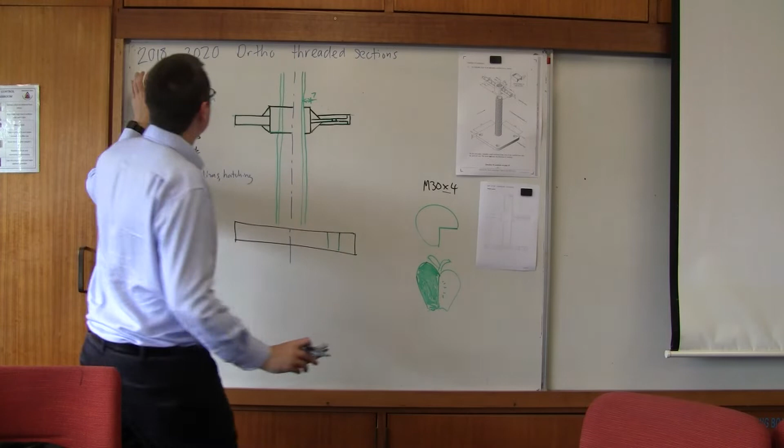In this video, I'm going to try and go through the 2018 to 2020 ortho-threaded sections. There has been an ortho-threaded section in every one of the last 20 years of papers. There sometimes can be questions where they want you to talk about third angle projection, and what that means is that you get the top view on the top and the front view on the front, and they need to line up. They can't be all over the place.

So I've drawn my construction lines, and then I've firmed in. I've got top and front. In Australia we use third angle projection. I will say though that has been less of a thing these days. So I just make it clear that even if you have the views in the right spot and they don't line up, you'll still lose marks. So it's important that the top view is on top and that they line up.

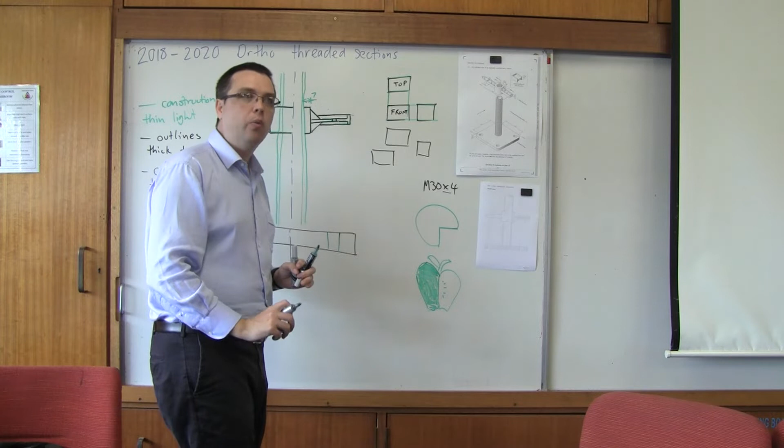We're going to do a half section. So when we do a half section, I have a picture of an apple. We can see that in a half section we're showing half of the apple in section, which means we're removing effectively 1/4 of the apple. Our section line would be 1/4 of the apple.

Because I'm using a whiteboard, I'm going to use different colours to represent my thick lines, my dark lines. I had already started drawing this drawing, but the camera was pointed in another direction, so I restarted.

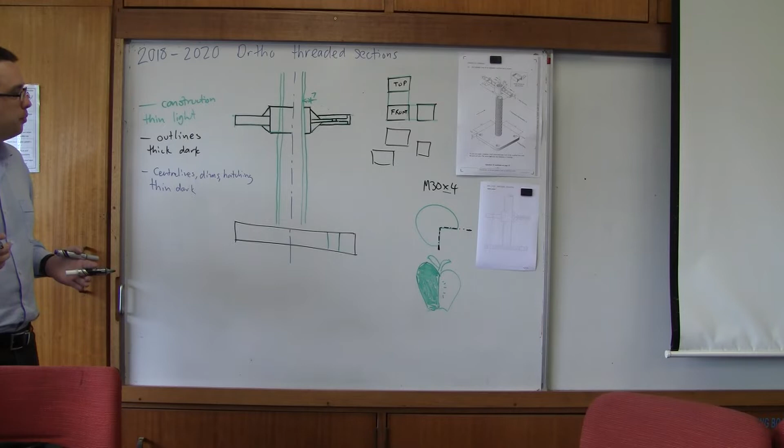The part we've done so far, I think, there's not a whole lot going on that's really of concern. What we talked about a little bit is how we worked out this dimension. We're told that this is an M30x4 bolt. Does that mean it's fine or coarse? Fine, right? The x means it's fine.

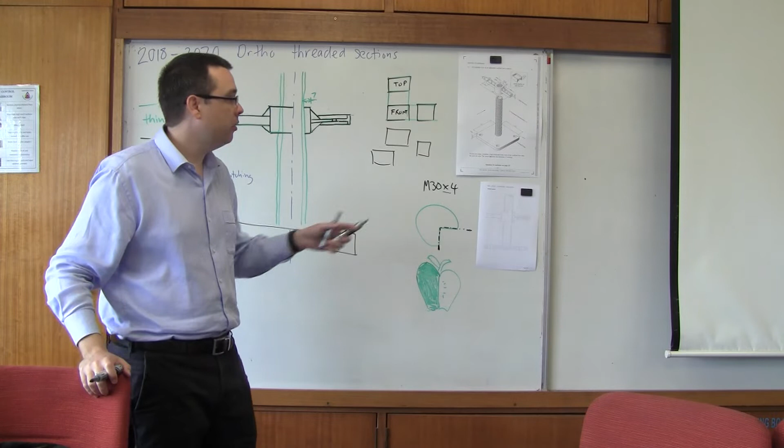So the d min, the distance from the outside to the inside, is going to be 30 minus. I'm just going to show those dimensions in green to show that's my working out. The outside here is 30. This is our d, which is 30. And then this value here is d min, which is 30 minus 4, which is 26. So that gives us that d min dimension.

Now, this dimension, we're told that the outside here is a diameter of 40. And if this is 30, that means, oh sorry, it's 44. 44 minus 30 equals 14. But there's two sides, so this is 7 millimeters. So 14 divided by 2 equals 7. That's how we get that 7.

Now, that dimension is far more likely to matter, whereas this dimension here, taking this 4 millimeters off the drawing, I don't think that you'd lose marks over that. So if you're rushing for time, and if this is a 6-mark question, you have 11 minutes or less to do this question.

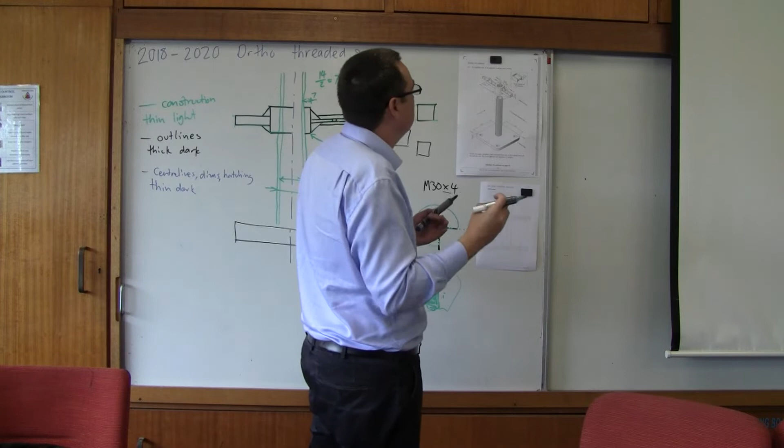If it's 11 minutes, you maybe don't have time to measure everything. If you're looking and say, I just can't see the distance, I can't see the size, then you're probably better off just doing something reasonable, because I don't think you're going to lose a whole lot of marks for that dimension.

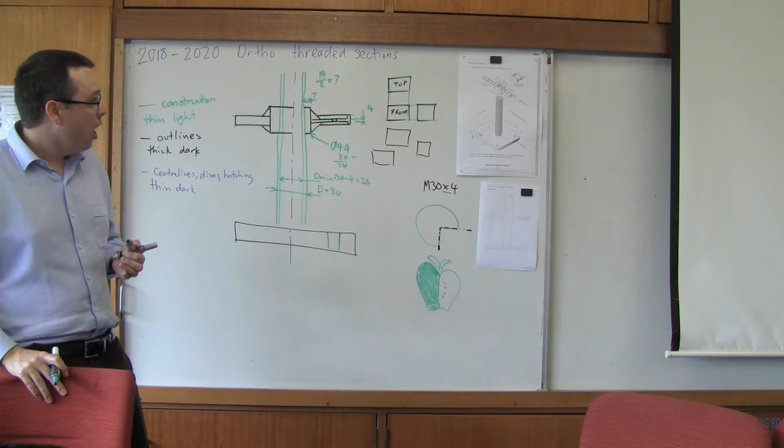Now, when I drew this, I drew the whole thing. Normally with a construction line, I would not remove it, but for you, I'm going to remove it just because I don't want to confuse you with the colours. And we're going to go through now, and we're going to section.

Now, in the HSC, the HSC gives us answers. I don't think we should be sectioning this part here. I think that we should be leaving that, following our rule of half sectioning. So that's the difference between me and the HSC. So what I'm going to go through now is I'm going to use my section lines.

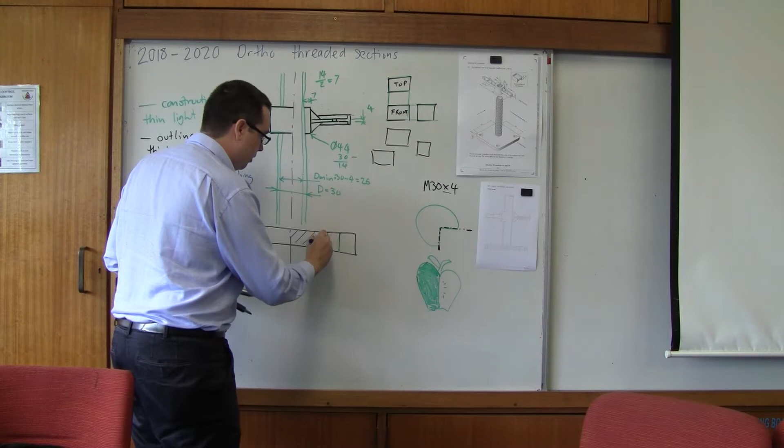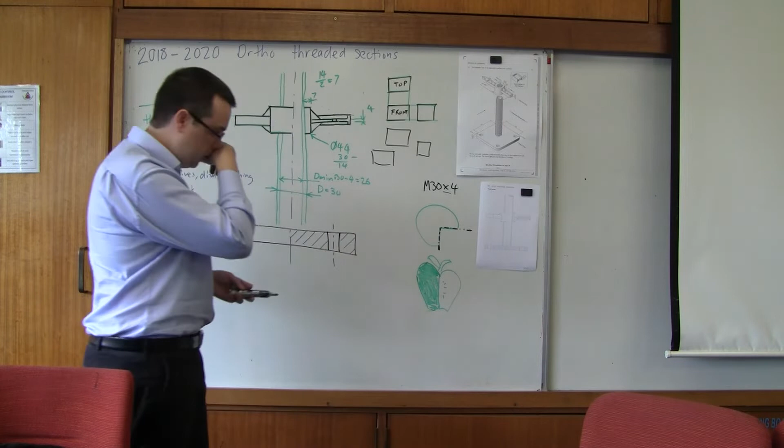And it should be thick, dark, and then thin, dark lines. Because we've got a hole, it's cylindrical, it should have a centre line. Now, the outside thread, it's going to be hard for me to draw over these lines perfectly without a ruler, but we'll see how I go. They should be thick, dark lines. The inside line should be thin, dark lines.

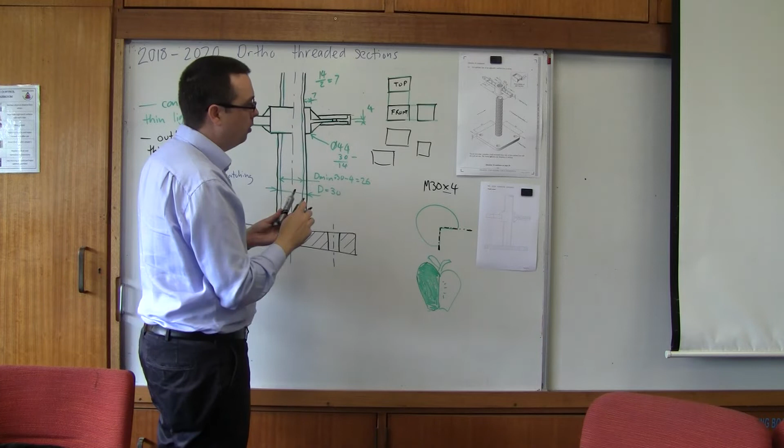Now, here, this is solid, so I've drawn that as a thick dark line already. I could have a different spacing. I could even change the angle because this material is not the same as that material. I don't think you're going to lose marks for using the same angle, but for me, I'm going to use the same angle with different spacings, because they are a different material.

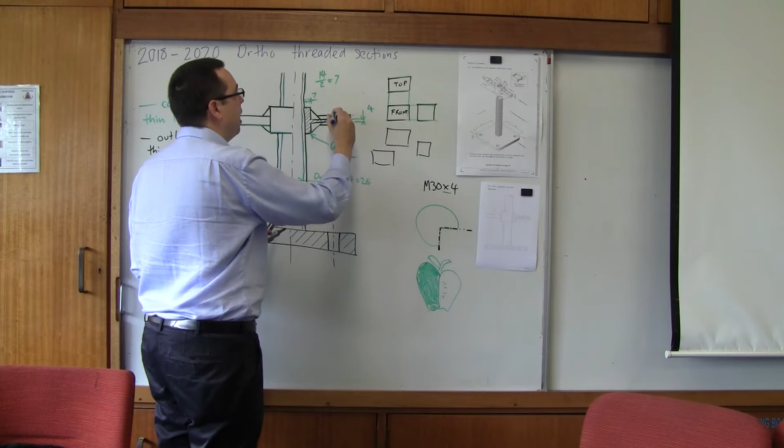And then we have a center line through here. And even though this is not a hidden detail, we can still show our center line through here as well.

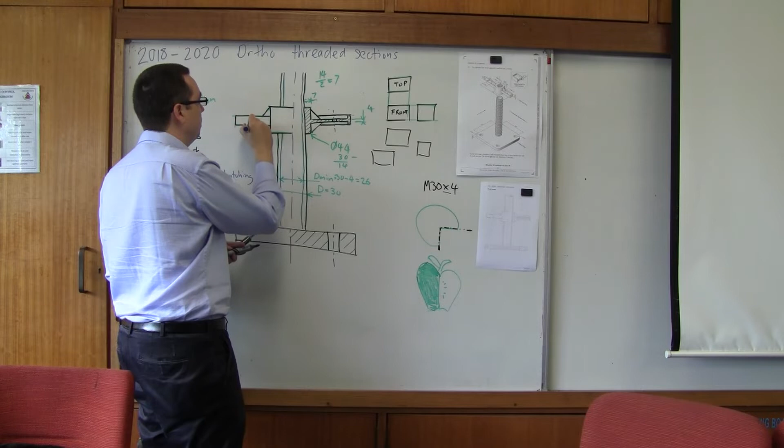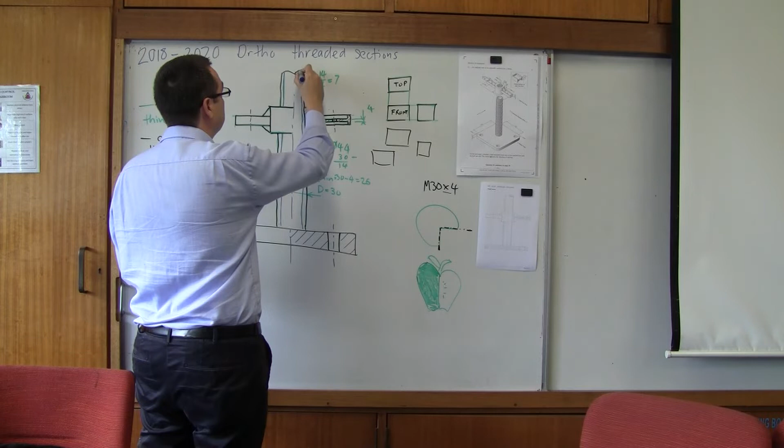Now, the last thing we need to do is we need to show our break line. Now, the break line, if you just did this, I think you'd get that. I don't think you'd lose any marks. But technically, you should actually have it hatched like this. Yeah, I had that in a different direction to show it's a different material. Again, I don't think that the HSC, yeah, they have a different spacing, but that's about it.

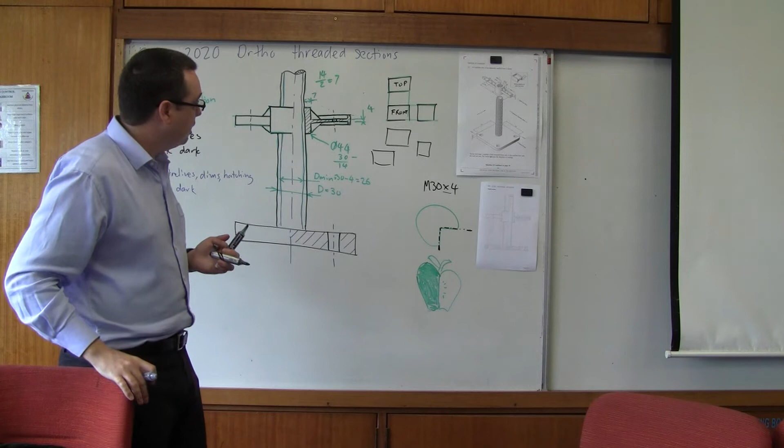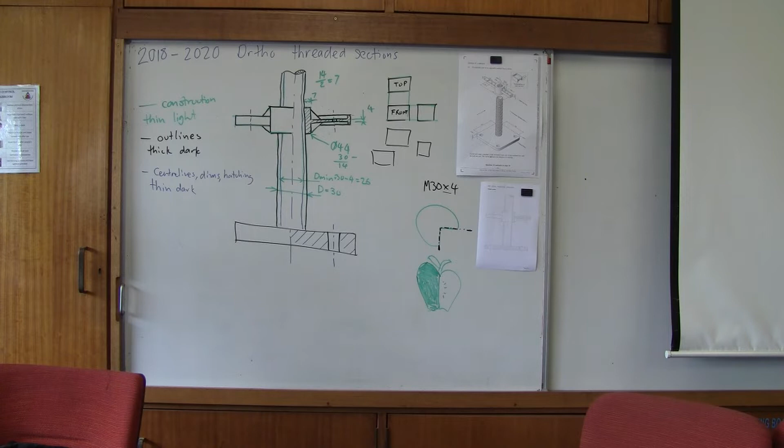That's pretty much everything I can think of for this drawing, right? For 6 marks, not having to show the top view, I think makes it a lot easier than it could have been. I think they could have shown the top view for 6 marks. I have seen a few responses, and I can tell you that for a 6-mark question, you have to make an attempt, right? You have to draw something because there's 2 marks for the taking just for simply trying, just for putting some sort of picture on the paper will get you 2 marks.

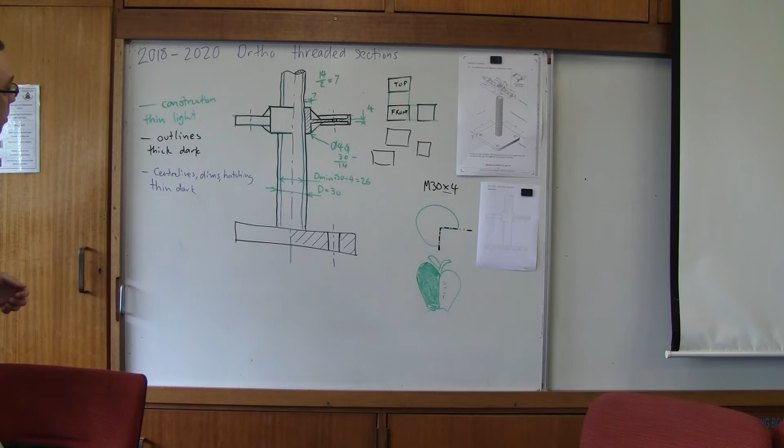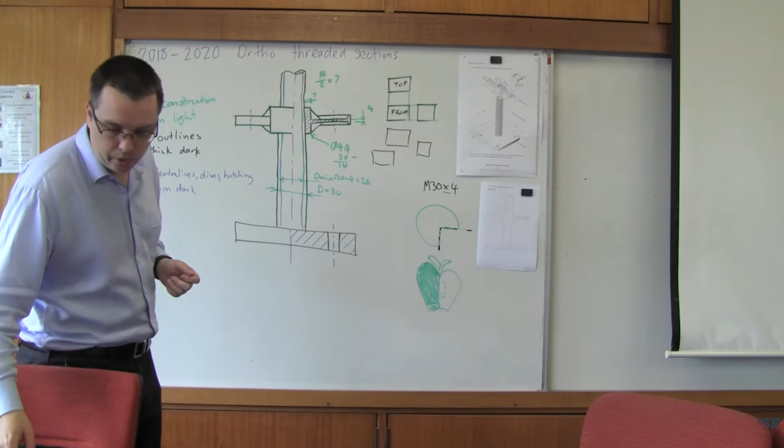Okay, so we've done our 2018 paper. It was question 24. We're going to move on to now the 2019 paper, and I'm going to try and draw that one for you. We've got the question on the board in a second. I'll clear the picture.

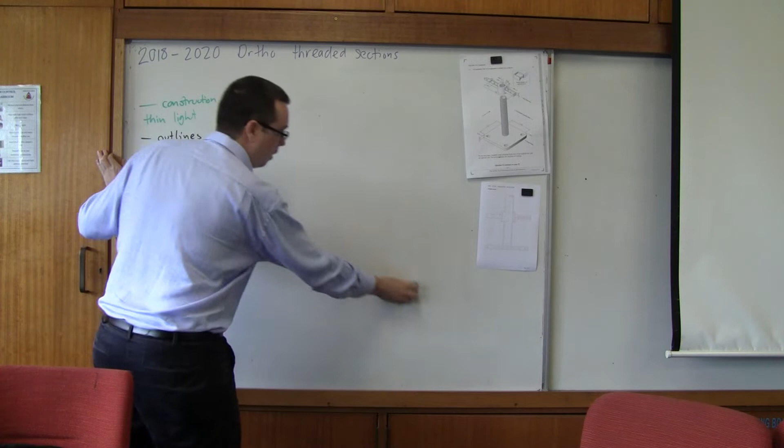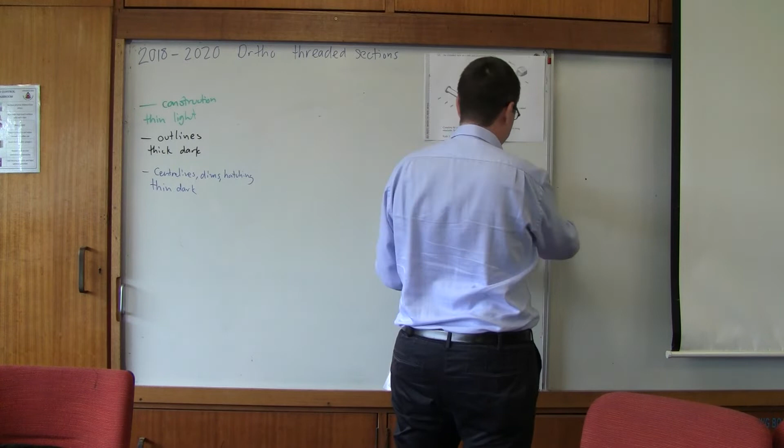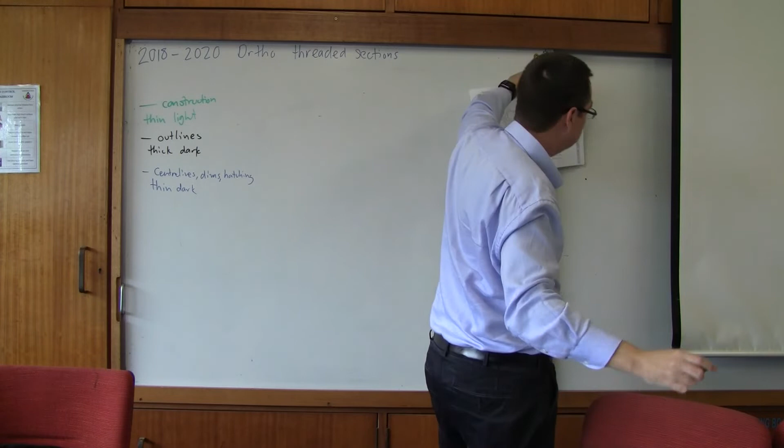The 2019 paper looks like this. Keep going. Wait, this is 2020. 2019 looks like this. Okay, this is only worth 3 marks. The last 2 years the paper has only been worth 3 marks. They give us a pretty good outline of where to start, so I think that's part of the reason why they can make this easier. I don't have the outline here.

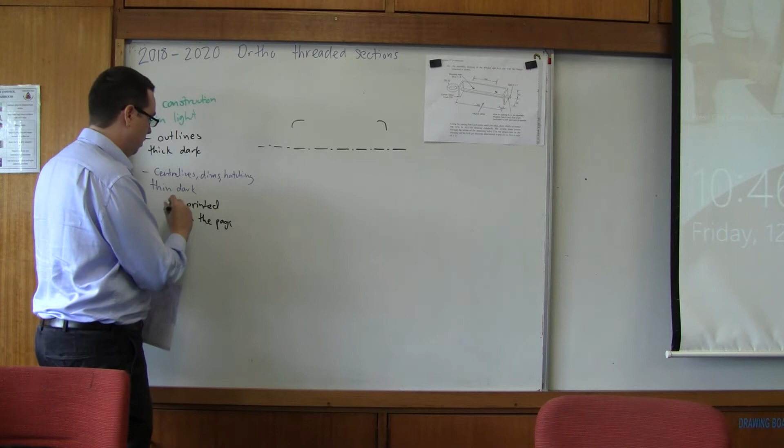Okay, so what have they given us? I will draw that up. They have given us this corner, and a center line. Now, ordinarily, center line should be in blue, but I did this one in black because it was printed on the page. And then they actually did a thinner center line here.

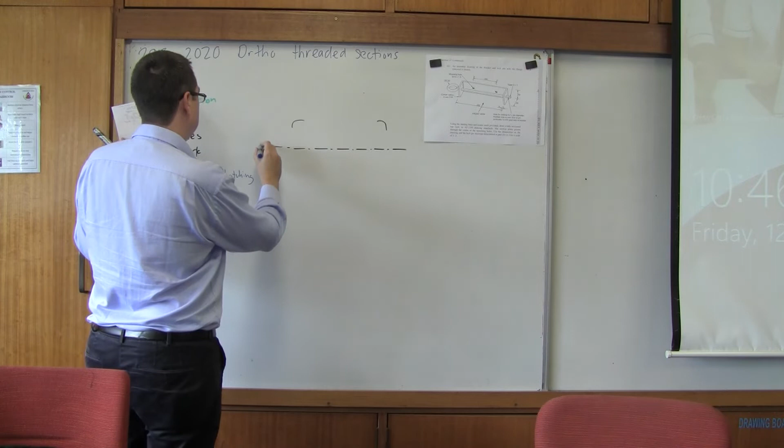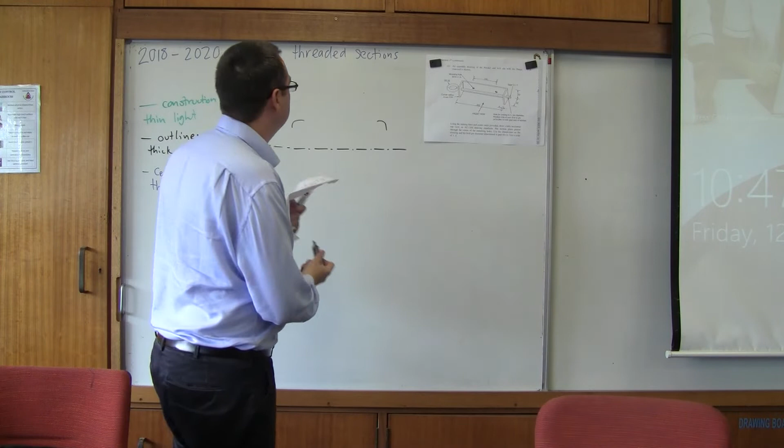So, using green for our construction lines, the first thing we need to do is, they've told us that it's 5 millimeters thickness, 50 mil long. We can assume that we've got the dimensions that we can measure 50 mil from. So it's not even a matter of assuming if it's in the center or not. It's 5 millimeters thick.

Now, you'll notice that I am not using a rule to measure these. And so this goes into my point of, don't get too fixated on dimensions. They don't care about dimensional accuracy these days. I think marking online has really affected that. What they're far more interested in is that you have understood the question.

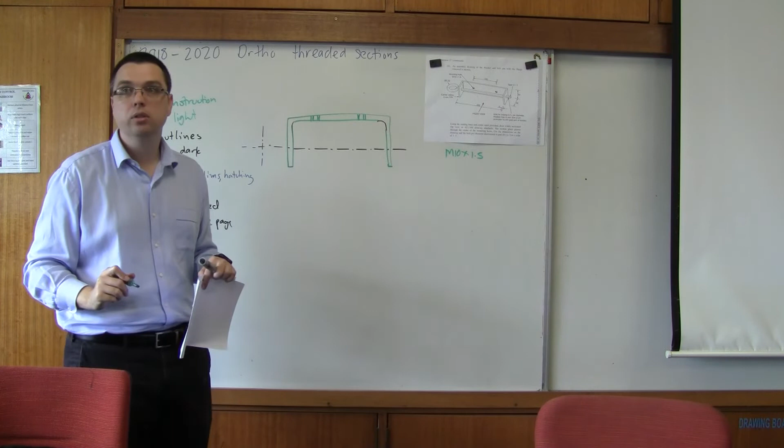Now, I think something a lot of people forget and a lot of people would have lost marks for is they said, this mounting hole is M10 times 1.5. Fine or coarse? Is it fine or coarse? Fine, because it's got an X. Right? Now that said, I would not be doing the deduction, me personally, to get 8.5 millimeters. I'd just say it's close enough that the marker's not going to be able to see looking at a scan on the screen.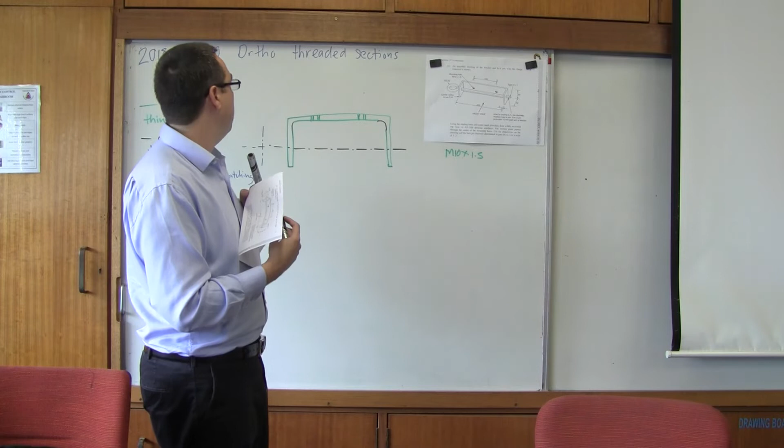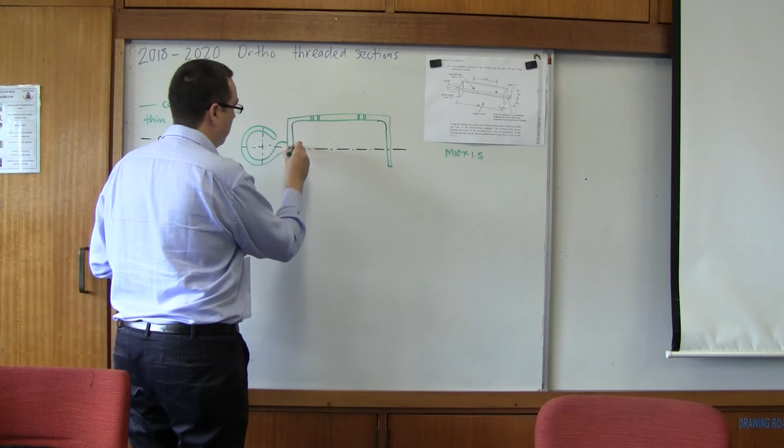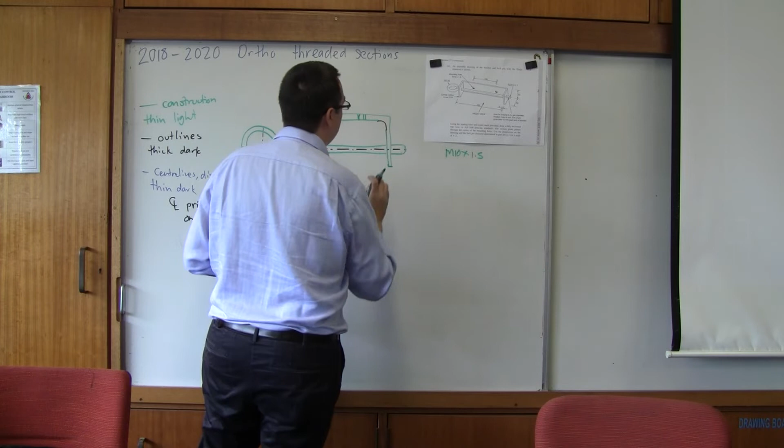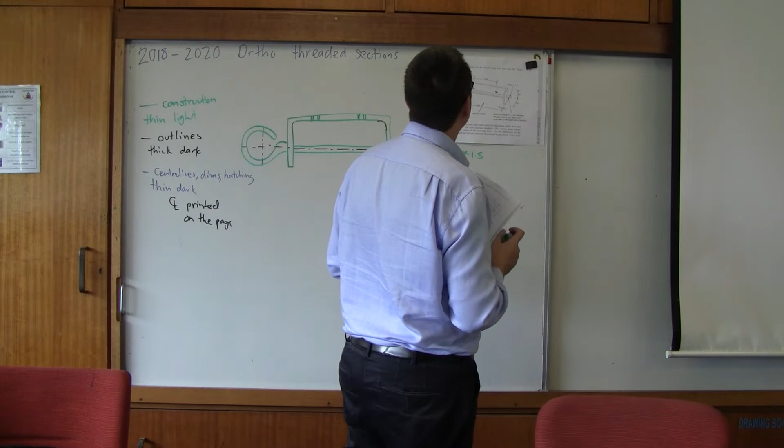Now, I have to draw this bolt. Again, I think if you free-handed this bolt, or this pin, you wouldn't lose any marks. Okay. Here's the dimensions. Use a scale of 1 to 2. Dimensions in the drawing, lock pin diameter. Draw a fully sectioned top view. Okay, so we're pretty close to having finished the whole drawing.

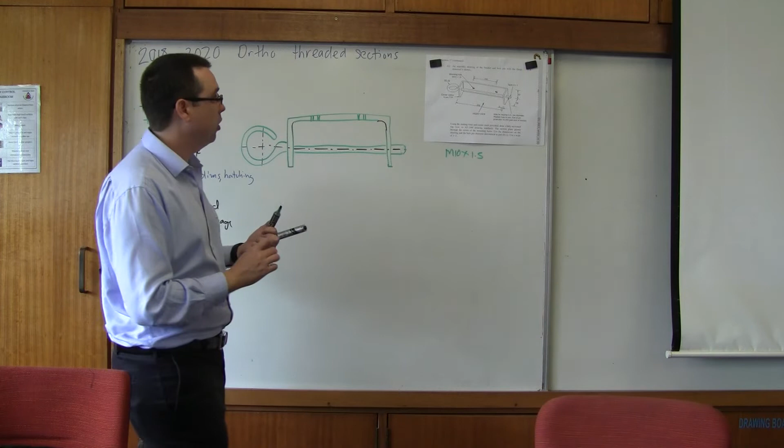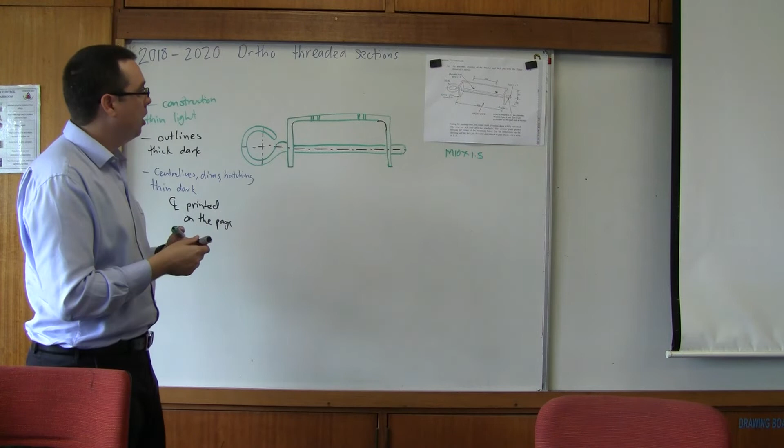Now the question is, do we section this pin? I don't think you would lose marks for sectioning this pin as long as you had sectioned something, right? But that's my position. What we want to do is we're going to outline our shapes in black. So once we've done our construction lines, we're going over it in a thick dark line. Now the outside of our threaded section is in thick dark lines. A whole pin.

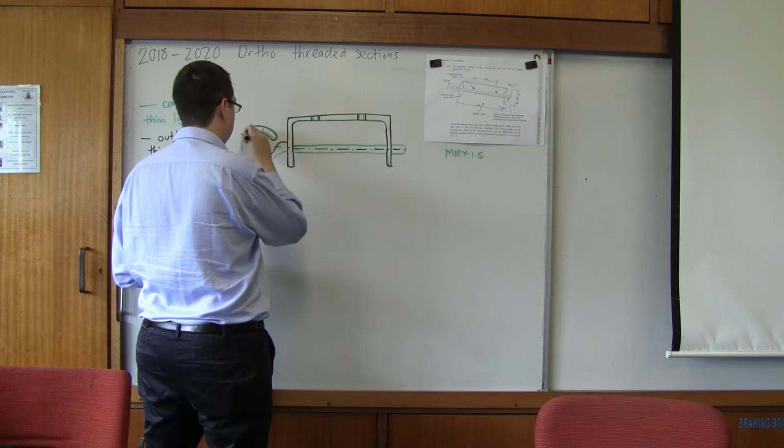Now this is why you don't section, you pay attention, because now I have to rub out the page, right? Because you'd lose a mark there for doing what I did. This here, you're going to lose a mark. This is the correct answer.

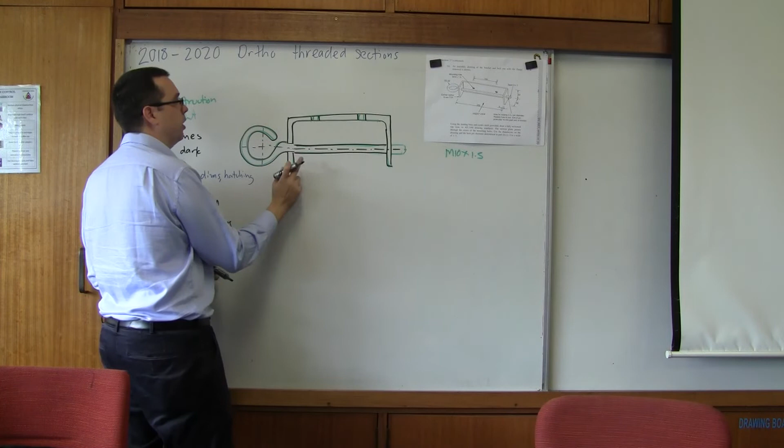Now, why am I unsure whether or not I should section this? Well, we don't section threads, right? We don't section washers, we don't section webs. So this is kind of in a grey area, this cylindrical object. I'm not sure whether or not I should section it. So I don't think you're going to lose marks. I will tell you that there were drawings that showed this section here as a detail. I don't think anyone lost marks for not including that detail there, that hole. And certainly not showing the center line, I don't think you're going to lose marks, but you should.

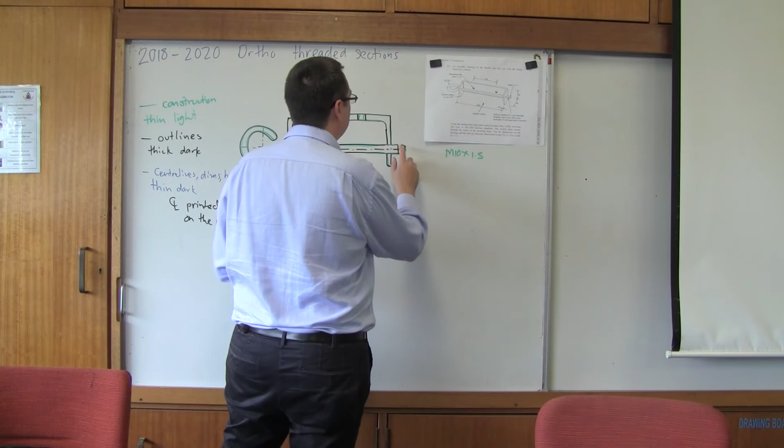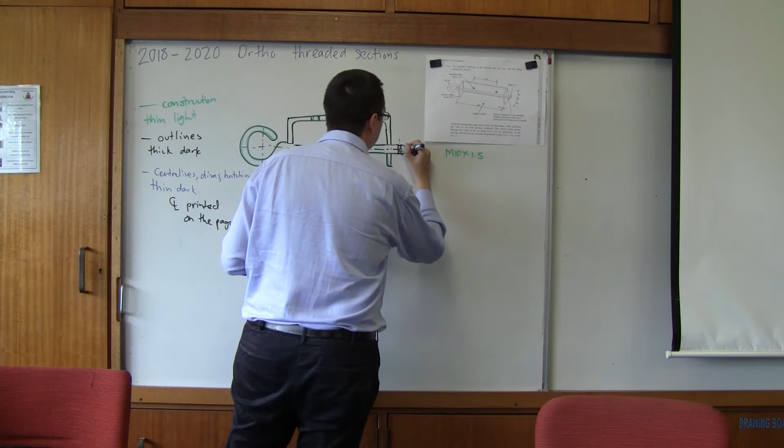There's even an element where a really advanced answer would say, oh, well, that would curve in. But you've got to remember, this is a 3-mark question. There's just not that much room for differentiation between a student who knows literally nothing and a student who's gone to a lot of work of showing the correct answer. So,

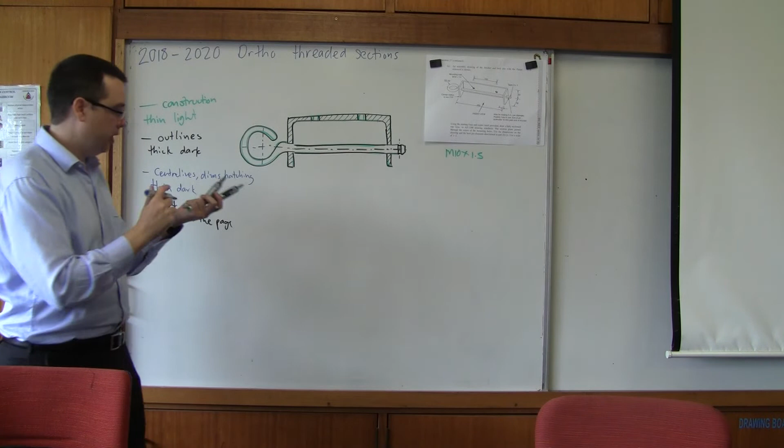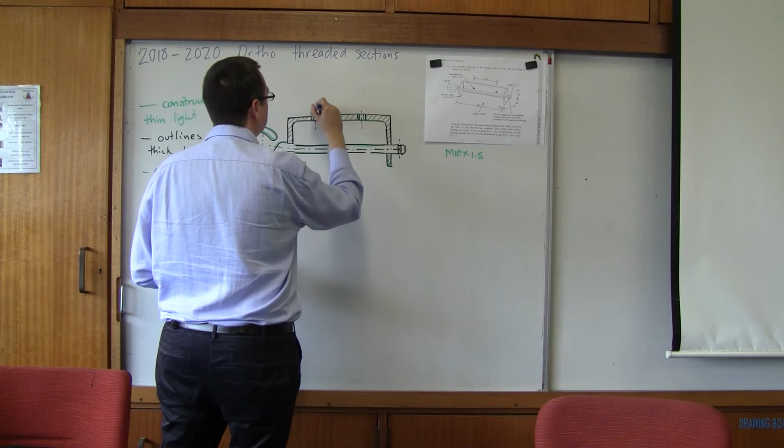funnily enough, I didn't print out the HSC answers. This internal thread, so this is how we view threads from the top, or axially, through that center line. Remember, we need to draw a center line here. Now, in my discussion with markers, I've made the point that I think these lines are really important. I think these should definitely be a part of marks. But for 3-mark questions, there's not a whole lot of room for differentiation. For a 6-mark question, we're in a much better position where we can start forcing.

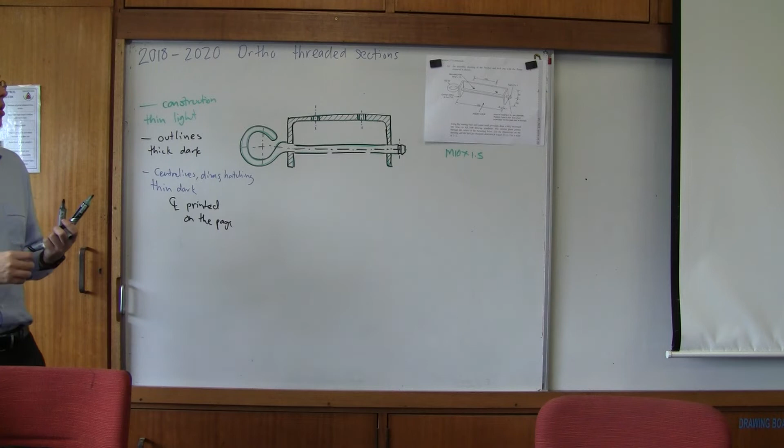This is nothing, where I smudged it with my hand, sorry.

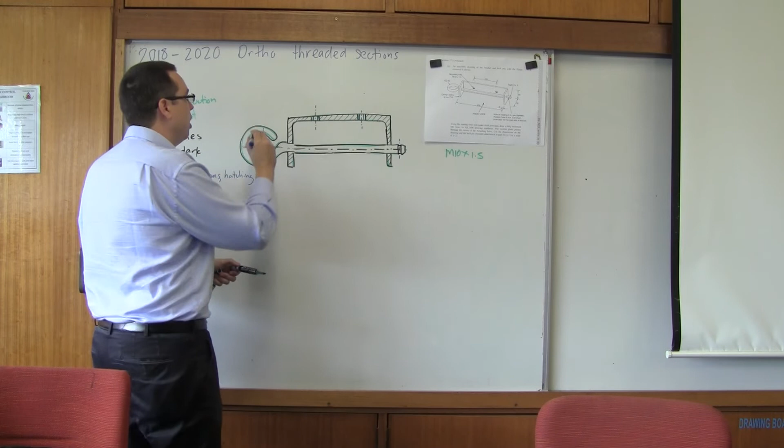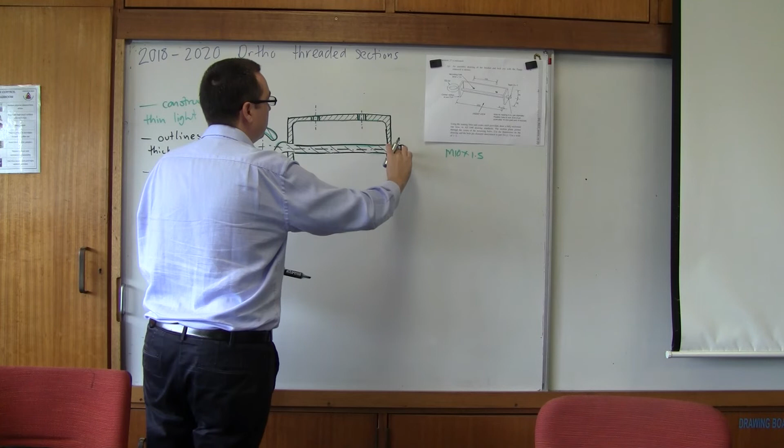I think if you're going to show that hole, at that point it probably makes sense to section. So let's just say for the sake of it, we are going to section. Well, if we are going to section, let's go like that. Yeah, just to show that this is a different material. If we go to a section, I don't think you'd lose marks one way or the other, personally. Okay, so that's what we're doing for the 2019 question.

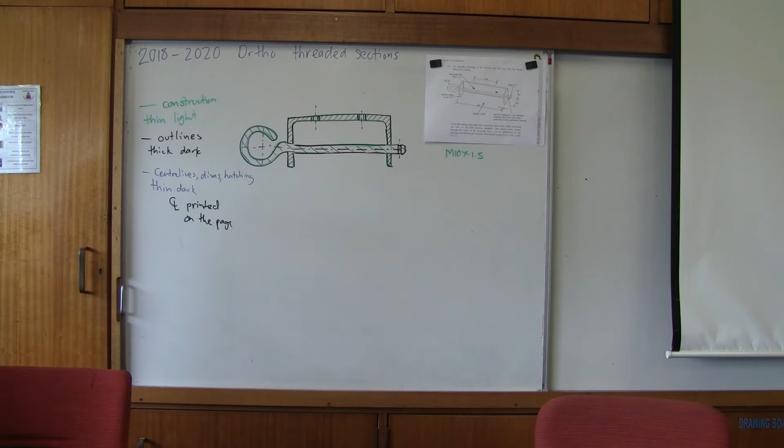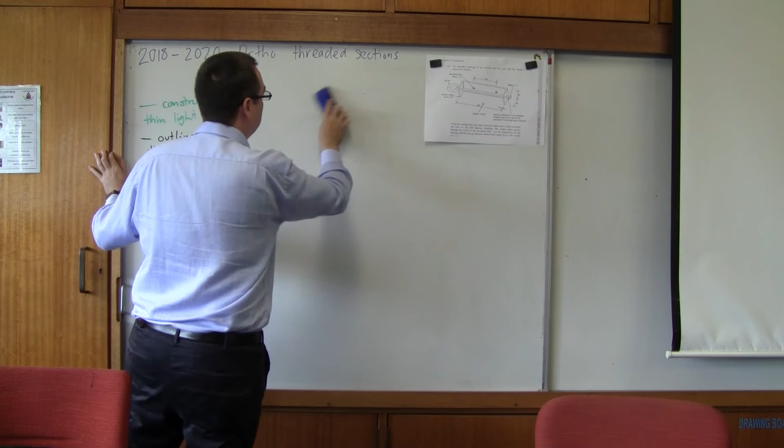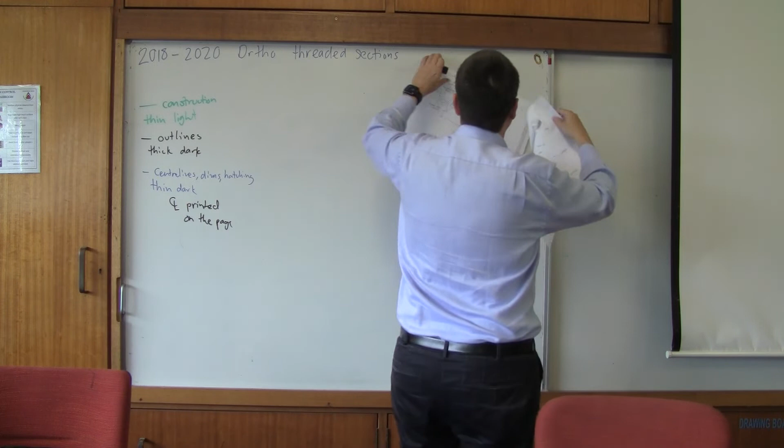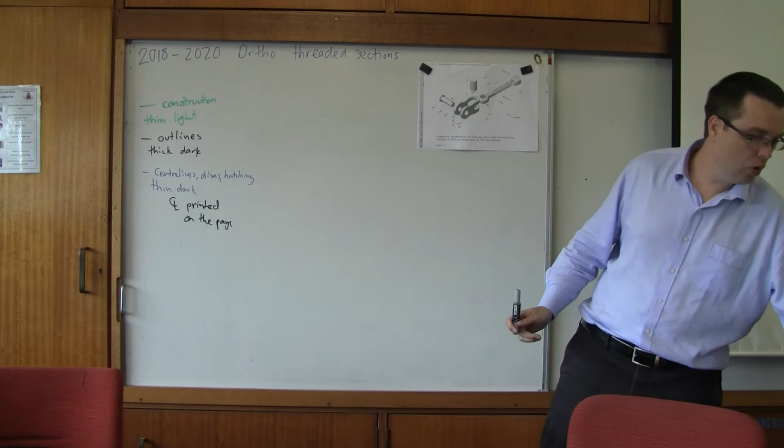Did they give us an outline? The HSC, I now found my answer. The HSC did not section the pin. But like I said, I don't think you're going to lose marks one way or the other. Do I have this answer? I do have this answer. Good. I'm looking for this answer even though I have seen this drawing a lot. So what I was looking for is, did they give us the outline? What was the outline? That was what I wanted to look at.

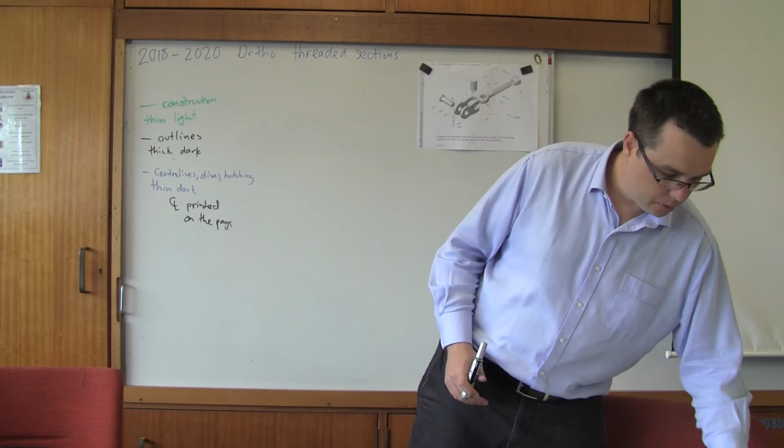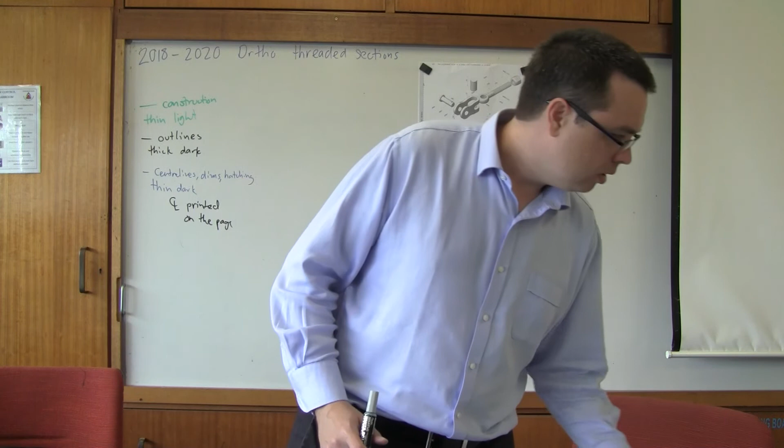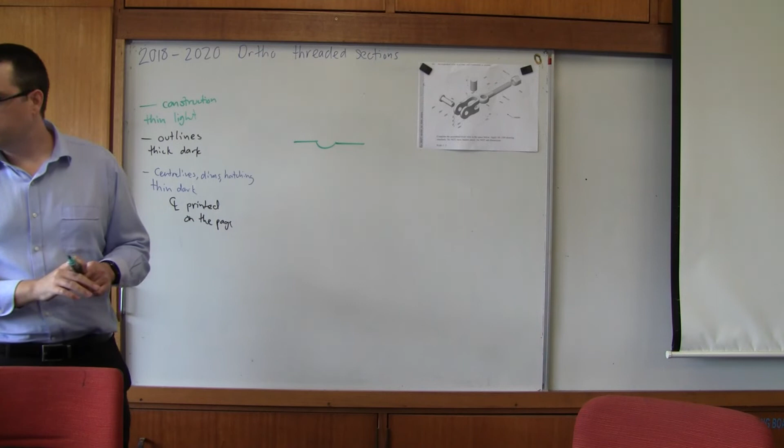Can't wait to find the one that I photocopied. No, we're just going to run with it. Okay, so they definitely gave us something. I think they gave us this shape. It's going to kill me. I'm sorry, people watching on the internet. I just need to know what was outlined.

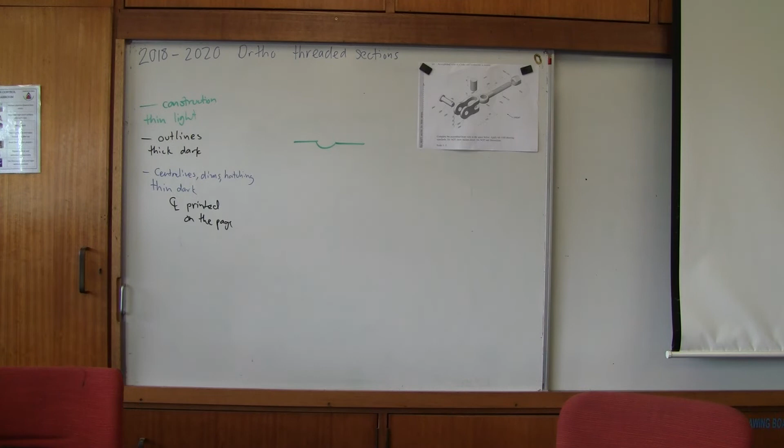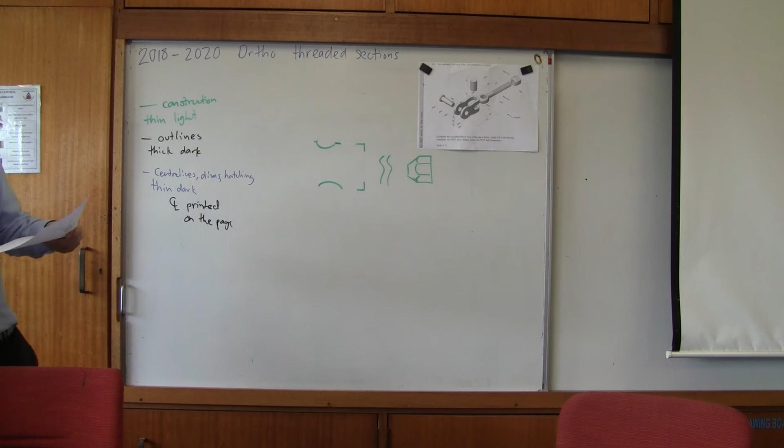Okay, so what was outlined is they gave us this curve, they gave us the corners, so they started with this, and they gave us the nut, dimension is very important. They gave us the center line and they gave us a break line. So the reason I included these, I'll just quickly print in. Were they thin dark? Yeah, pretty thin dark. I'm going to do it in blue just to maintain the convention that that's what they should be.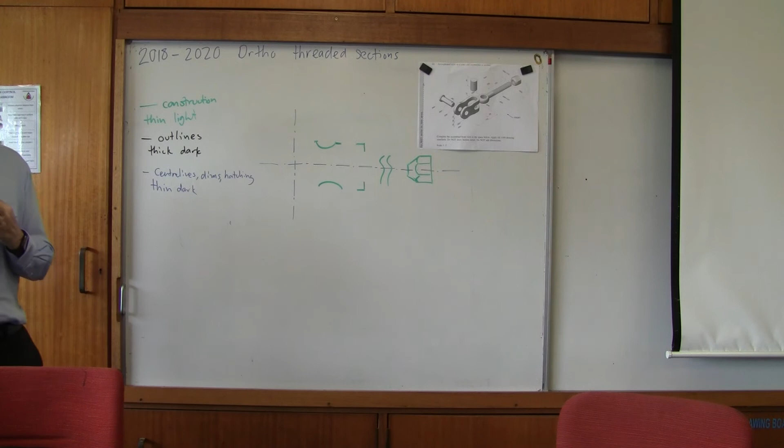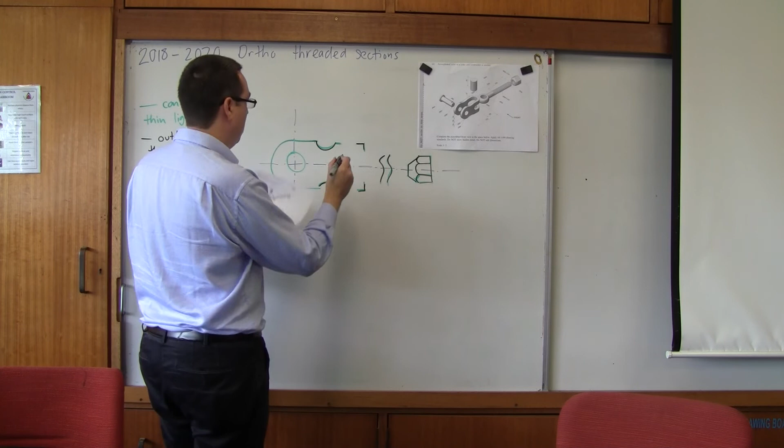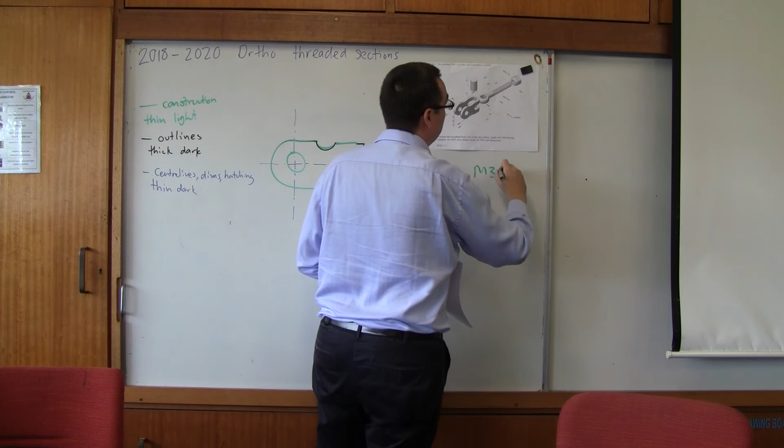Okay, so that's what they gave us, and so what they're looking for, I'm going to actually put some black. They gave us those lines. What do we have to do? So we're going to draw this circle. We know that we need to show another circle within it. That didn't require a whole lot of thought, this line, but what we need to do is calculate the width. So again, they've written M30 x 3.5, which is fine coarse.

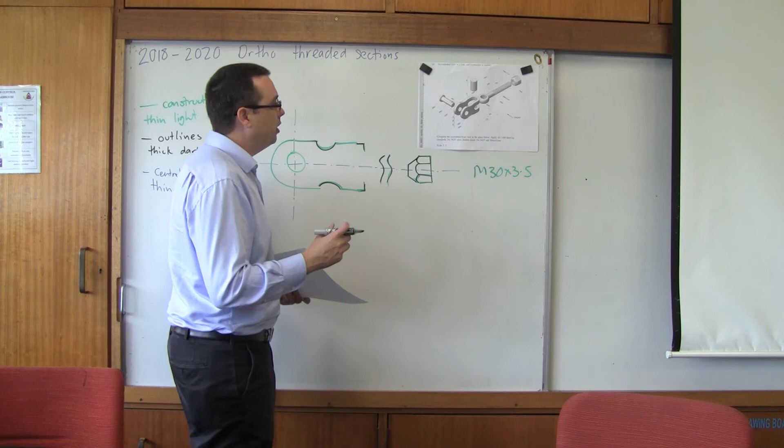Yeah, I know, it's getting repetitive. It would actually be helpful if we had a couple of coarse just to show the point. But what we're looking at here is the eyelet, I guess I'm going to call that. So that's slightly rounded. Now, you can say with a fair amount of confidence you're not going to lose marks for dimensional accuracy.

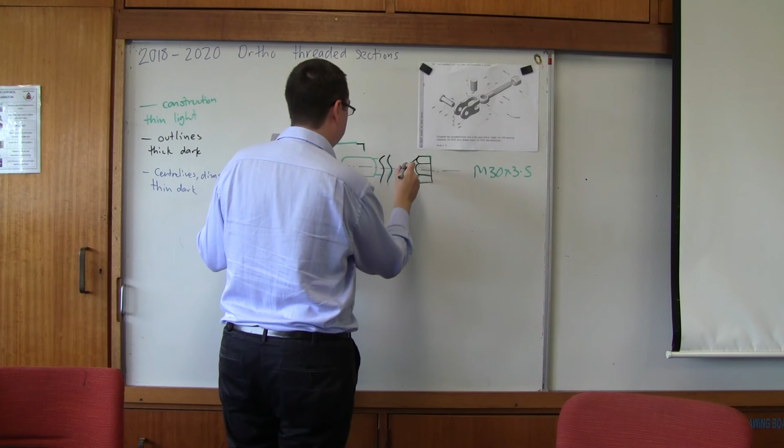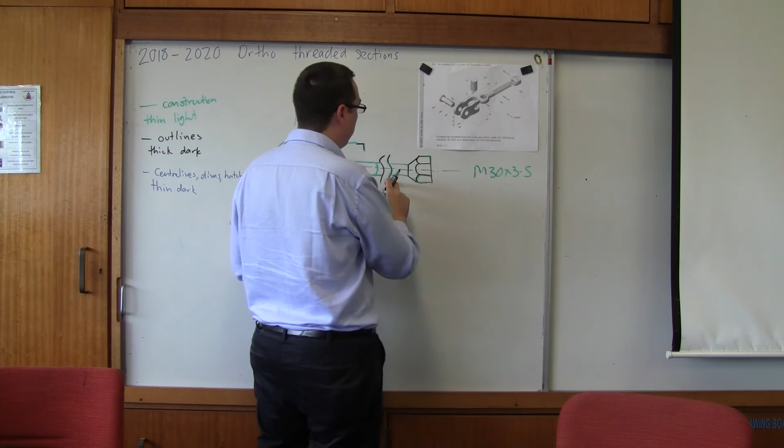Oh, we can actually even infer things here. In my experience, I don't think I've seen people use compasses to draw this. We should show some amount of thread. Now, because of this break line, we can't know how much thread protrudes, but some amount should be shown as protruding. So I'm going to draw that in.

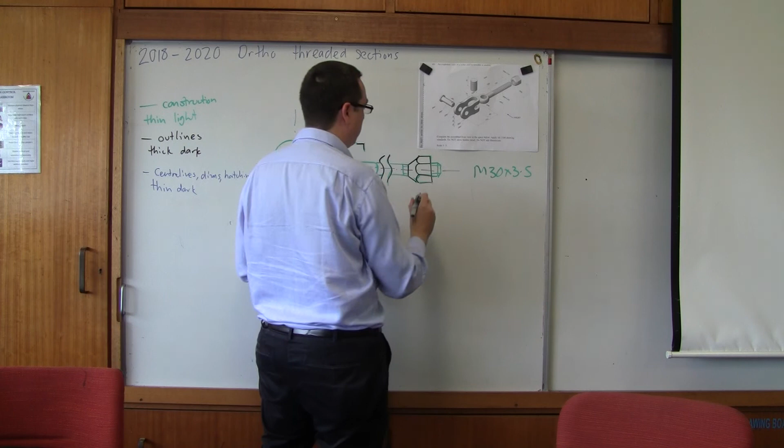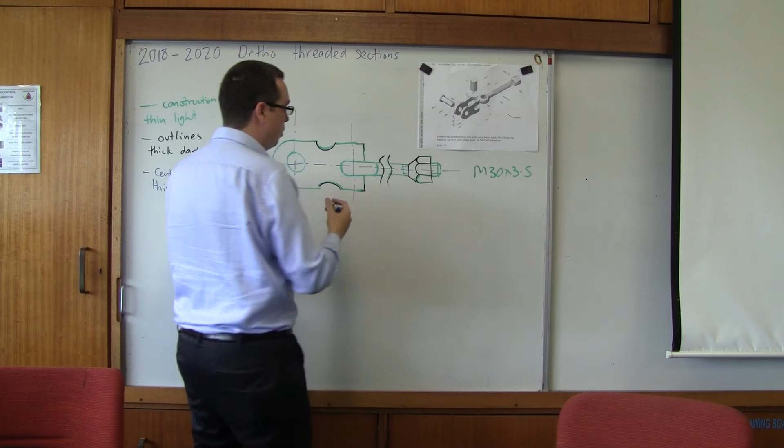And then center lines are really important. Now, in the HSC answers, you can see that there are actually multiple center lines we could have, because there's the center line for the bend, there's the center line for this, and there's a center line for that. As long as you show one center line, I think that would be sufficient. Like I said, I don't know how much concern there was for those. These lines should be thin, dark lines. I don't think there was a huge issue with that, but I maintain when I do my marking there should be a difference between the line weights.